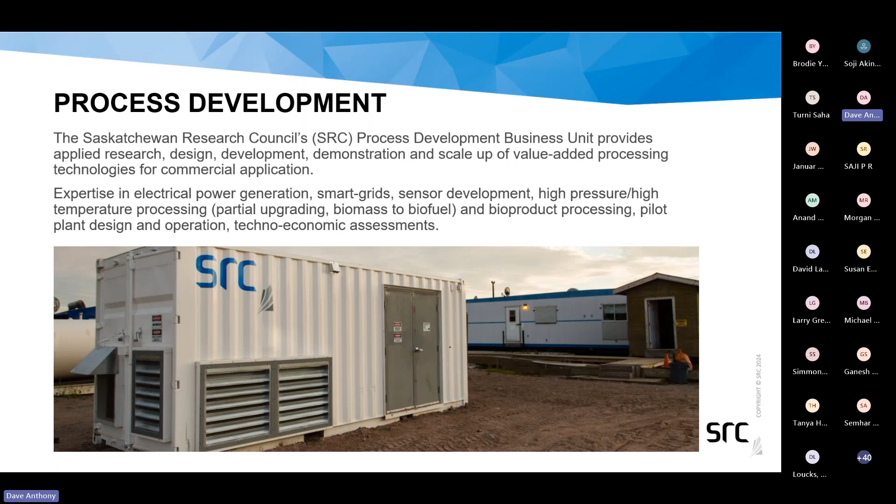So onward now to the RMJIC Hydrogen Hub study. I'm just going to take a sip of water here.

This report and study was a collaboration between the Transition Accelerator, ourselves, and the University of Regina. It was funded by the Saskatchewan Ministry of Energy and Resources, Federated Cooperatives Limited, and Whitecap Resources. They are the steering committee members, and of course involved also in discussions are the broader stakeholder group, including over 25 organizations like the cities of Regina and Moose Jaw, utilities, mining companies, agricultural companies, transportation, communities, etc. And of course, interest is open to all parties as we do these.

So the RMJIC, the Regina Moose Jaw Industrial Corridor area of interest for the project, is noted by the red polygon here, extending from the east of Regina to the west of Moose Jaw and including Belle Plaine. The extent of that area of interest was chosen based on the available data and locations of industry and potential opportunities that could be associated with hydrogen in the region. The treaty lands and First Nations areas within the RMJIC that we mentioned earlier are also shown.

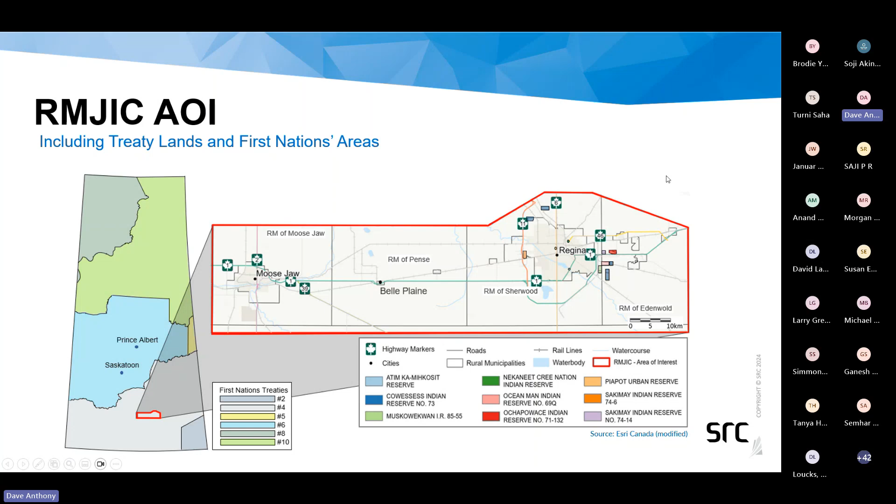And then first off, we'll get into infrastructure here. One of the ways of moving hydrogen would be the use of our highways and rail networks. Shown at the top of this slide are the major highways and rail networks running throughout the RMJIC. The main highways that connect the region to Western Canada, Eastern Canada, and the US are shown.

The same is also shown here for the CPKC, or the Canadian Pacific Kansas City Railway, which runs through the Global Transportation Hub here in Regina, and the Canadian National Railway as well. Shown below, zoomed out from each of those, are the main highway routes on the left, the main railway routes on the right between CPKC and CN, en route to the coast of BC and to the US.

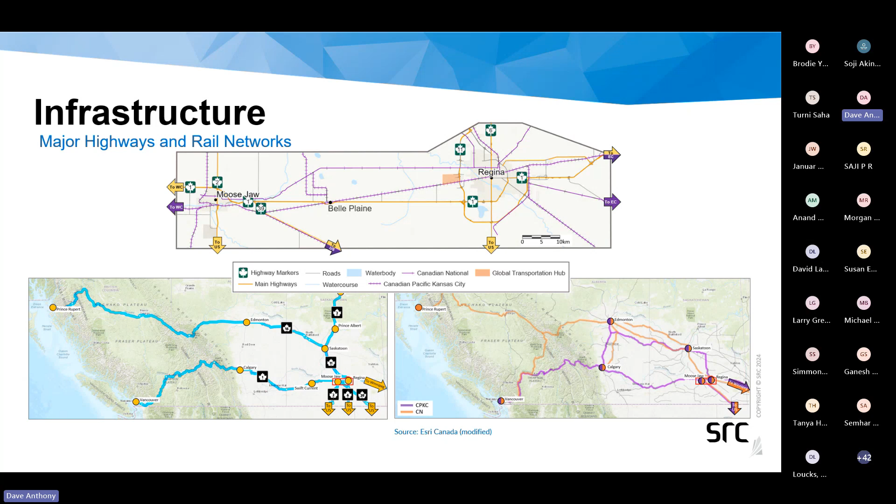Of course, opportunities could be there. We don't produce as much natural gas as Alberta does, in terms of opportunities there for hydrogen production for export. And as well, the US appears to be moving much faster when it comes to the development of hydrogen hubs. So it's really tough to say what that export potential might look like for Saskatchewan across the board.

As well, infrastructure - just looking at the liquid and gas pipeline network from the RMJIC through to the coast of BC. Of course, hydrogen blending pilots are ongoing in Alberta, as many of us know, at 5% blending rates. Research has shown that we may get up to 15 to 20% blending, but that's really somewhat site and area specific. There are more things to look at in terms of using those pipelines for hydrogen blending, but with interest, Saskatchewan could look at similar pilots, hydrogen blending with natural gas over the early to midterm. Ultimately, if we're looking at large scale adoption of hydrogen for building and process heat, there would certainly have to be significant upgrades, including dedicated pipelines for hydrogen. But these pipelines would also serve other hydrogen markets, including transportation.

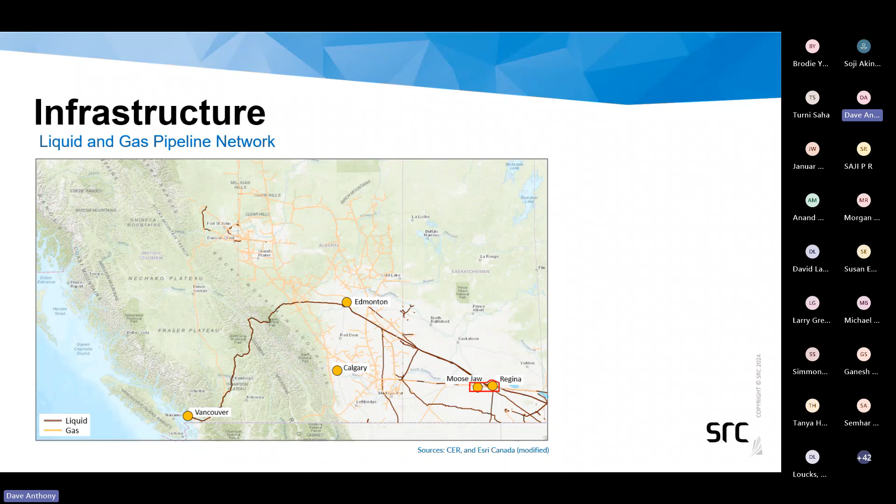There could also be potential for the agricultural industry here, with a third of transportation energy use in the province tied to farm machinery. It's hard to believe, with over 1,000 medium and heavy duty trucks rolling through the southern half of the province every day, that a third of that energy use is through agriculture. But we'll be showing a bit of that later on in the presentation.

So yes, infrastructure again - this slide shows the 9 or 10 major industries throughout the RMJIC that could possibly use, or in a couple of cases produce, hydrogen to support a hydrogen hub. It also shows the location of approved CO2 storage and approved lease of space for future CO2 storage in the RMJIC. It also points to the Weyburn-Estevan CCUS hub south of the region, where CO2 is used to support enhanced oil recovery and reduce emissions in the process. Now, if the RMJIC is to produce blue hydrogen from natural gas, that captured CO2 would also require a solution for its storage and use. So it would therefore be ideal to have a CCUS hub to support a future hydrogen hub.

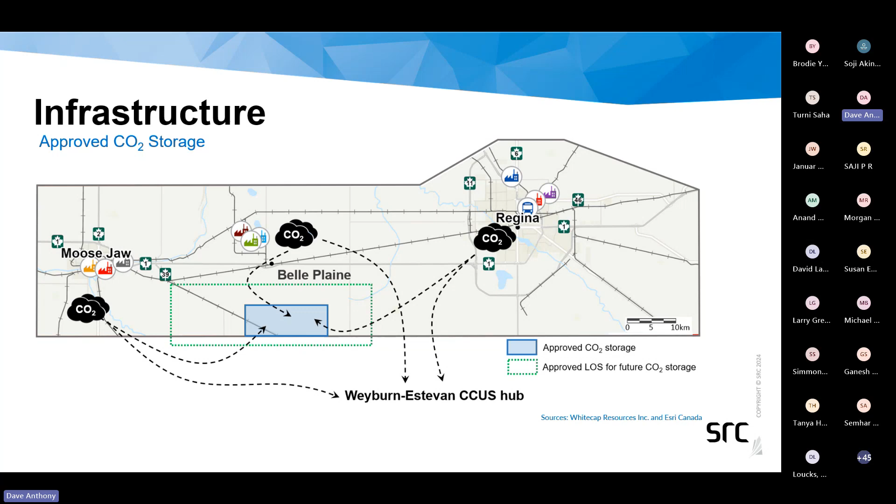So, early estimates - early on in the project, we wanted to help sort of set the focus for the project, and so we produced some early estimates based on current energy use to help us with that. So when we break down...

Just going to grab another sip of water here, folks.

As for the transportation sector, we see opportunities for medium and heavy-duty trucking, which Alberta and other provinces are currently moving forward on in terms of hydrogen, diesel, dual fuel trucks, and so on. Our greatest opportunity in transportation could stem from one of our greater challenges, and that's agriculture, with that third of total transportation energy use throughout the province. But it's too big of an opportunity, or certainly too big of a challenge, to ignore.

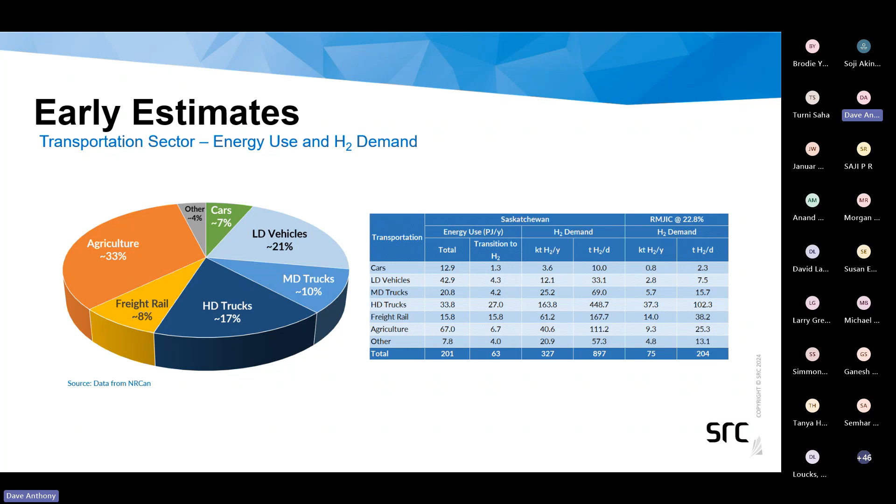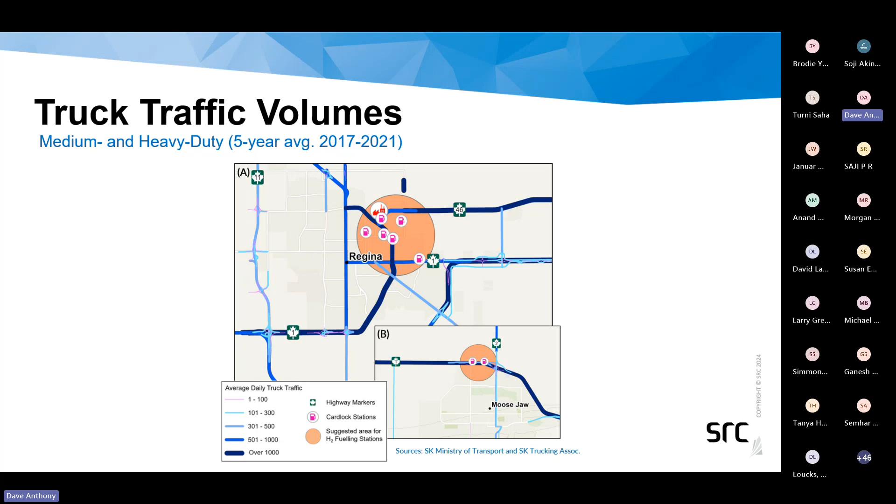Looking at hydrogen production costs, this slide comes from the Transition Accelerator. They use it in some of their other materials. We've just slightly modified it. It shows that the early adoption of hydrogen fuel would also be targeting a transition from diesel in the transportation sector, at least in the early stages.

Consumers pay much more for diesel per unit of energy than for natural gas or for electricity. A retail price of $2 per liter of diesel would correspond to an equivalent hydrogen retail price of about $8 to $10 per kilogram, based on an energy efficiency of 0.86 gigajoules of hydrogen per gigajoule of diesel. So if you had a hydrogen production cost of around $2 a kilogram, this would leave you a margin of about $6 to $8 per kilogram to cover the costs of transport and infrastructure.

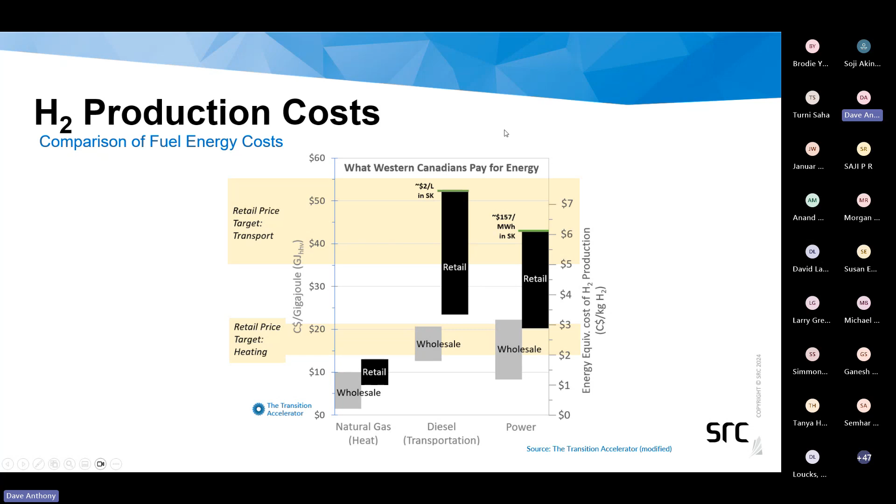So that $2 I'm showing here in terms of dollars per kilogram of hydrogen, shown on this chart, is the cost of hydrogen production as of 2022 and projections to 2030 and 2040, considering our current rate of federal carbon taxes. Most of the more common methods you'll see here for hydrogen production are shown. As discussed on the previous slide, that $2 per kilogram would be competitive with diesel, as shown on the right side of this graph.

We are practically there now when it comes to blue hydrogen production from natural gas. But of course, there are other costs in terms of moving hydrogen and so on, and storage. This graph also shows the production costs of natural gas and diesel. Since this is not an appropriate comparison in terms of comparing it with natural gas and diesel, I will show you the next slide, which shows that comparison in terms of energy units.

So when we look at this across the board, we can see that hydrogen is approaching the cost of natural gas production and is certainly competitive against the cost of diesel production, with the exception of hydrogen produced through electrolysis. However, this will certainly improve over time as those costs of electrolyzers improve.

While options for electrolytic hydrogen include production from nuclear, the production of hydrogen via nuclear thermolysis also could be very competitive in the years to come, which would certainly bode very well for the province of Saskatchewan, as nuclear is certainly moving forward here in the province and will be more of a thing come the mid-2030s.

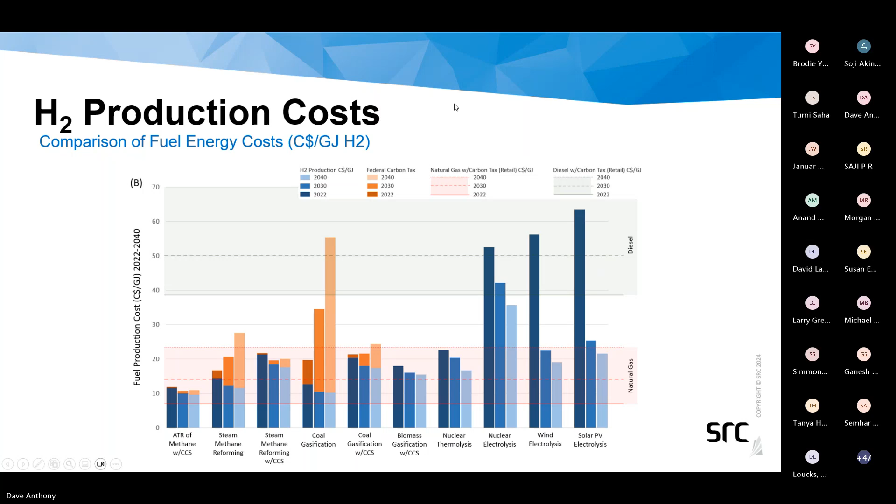And then again, from the Transition Accelerator, showing the cost of processing, transport, and fueling stations. This shows the economics of hydrogen production, transport, and fueling stations. Between the current cost of blue hydrogen production, the processing and transport of hydrogen at upwards of 8 tons per day, and the fueling of hydrogen transport at a minimum threshold of 2 tons per day, the retail cost of around $7 to $8 a kilo is then doable for transport, as shown by the retail price target for transport, that upper yellow horizontal band on this chart.

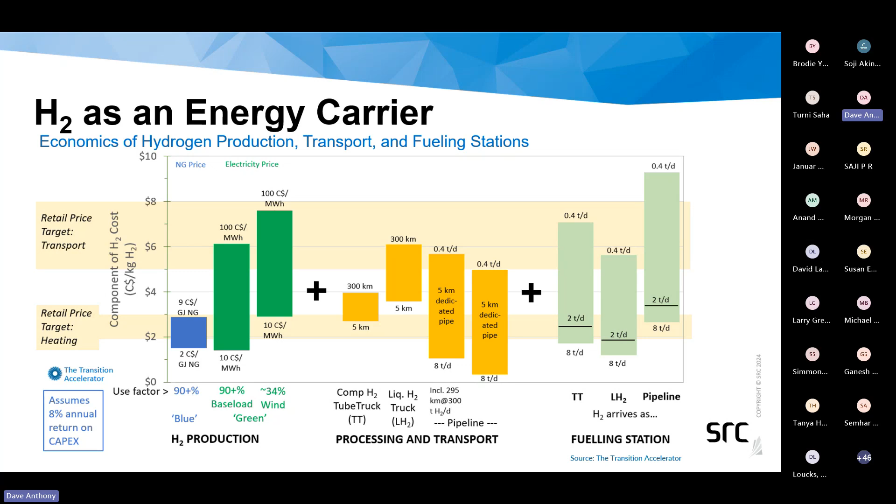As for the target retail price for heating, we certainly will need more time in order to get to something that works for hydrogen there.

I did mention underground hydrogen storage in salt caverns. This map shows the thickness of the prairie evaporite throughout Saskatchewan, from which our potash is mined. It's also a zone of potential hydrogen storage, having been used for natural gas storage over the years. However, this opportunity deserves more in-depth study, and it's something we can work on here at SRC.

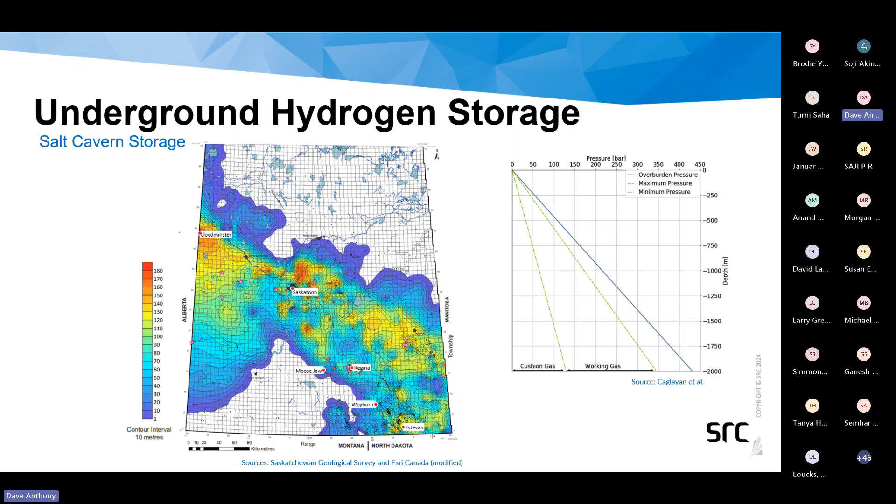To evaluate the ultimate opportunity and potential to support a hydrogen economy, as I noted previously, storage will be critical to large-scale hydrogen production, especially when supporting the intermittency of renewable energy. The chart on the right shows the depths and associated working gas pressures ideal for salt cavern storage of hydrogen, and our salt caverns here in Saskatchewan typically check both of those boxes, at least as a starting point. So then a deeper dive in these next couple of slides in terms of hydrogen demand.

When we did this for the report, this factored in the area activity in the RMJIC, as opposed to solely a percentage of the population of Saskatchewan.

Shown here, by 2028, 98% of that demand will be attributed to industrial feedstock, as it is now, for oil refining and fertilizer production in the region. Of the 2% attributed to fuel, nearly half is estimated for the transportation sector, as they are among the earliest hydrogen fuel adopters. Considering that demand for hydrogen fuel, the total is estimated at around 16 tons per day by 2028 between industry, transportation, and commercial and residential applications.

Now we look at estimates for hydrogen demand by 2035 based on area activity. That demand jumps to roughly 146 tons per day, with a greater share attributed to fuel at 16%, and demand increasing in the industrial, commercial, and residential sectors.

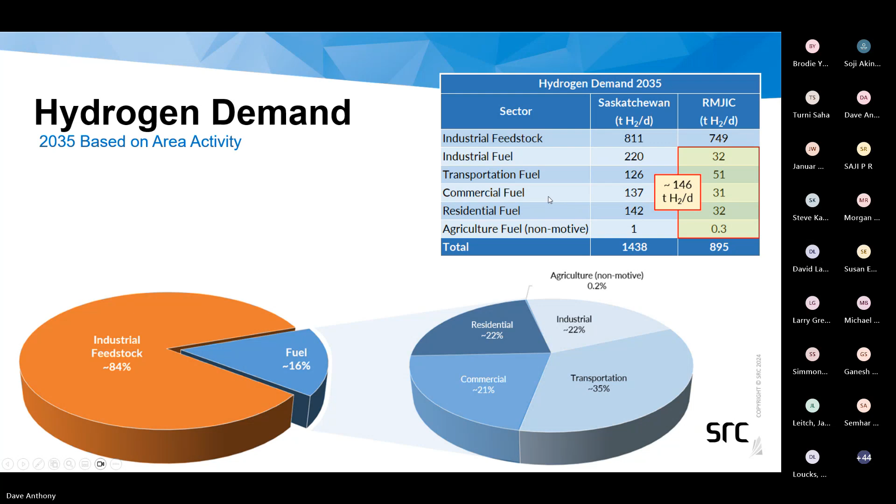In the transportation sector by 2035, through the estimates of the 51 tons of hydrogen per day estimated for transportation, most of that falls under long-haul transport, medium or heavy-duty trucks, and freight rail.

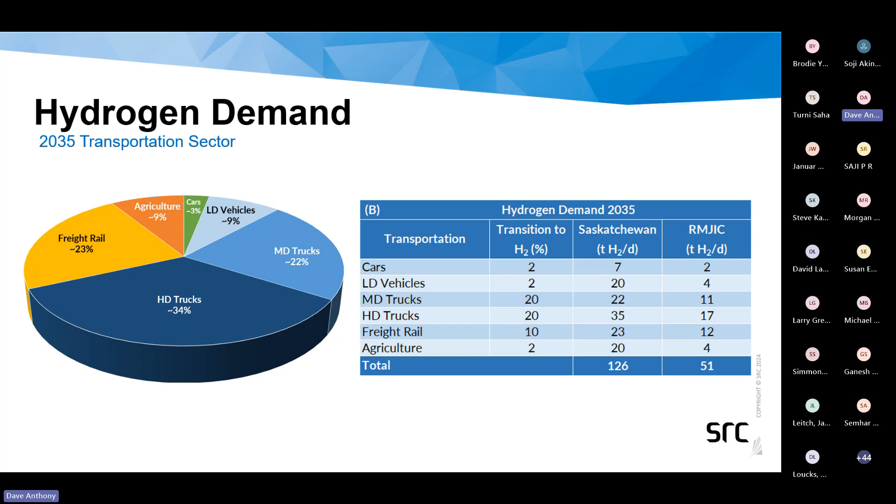As mentioned, hydrogen diesel dual-fuel truck development and pilot demonstrations are well underway, certainly in Alberta, and a transition to 100% hydrogen fuel cell trucks will likely follow as we have the infrastructure in place. CPKC, Canadian Pacific Kansas City, already has 3 hydrogen fuel cell trains in Western Canada, with plans to bring on more.

As I mentioned, yes, we need to be looking at CCUS opportunities here, because where there is potential to produce blue hydrogen from natural gas, there is a need for a regional CCUS hub to support a regional hydrogen hub. In the case of the RMJIC, this could tie into the Weyburn-Estevan CCUS hub in southern Saskatchewan, the area of Boundary Dam and EOR with Whitecap, CO2 EOR. With a connection via pipeline, potential producers of hydrogen in the RMJIC could send their CO2 to support emissions-reduced oil production in the province.

So then we look at potential demand in a low emissions future, taking 2050 roughly as the time frame for that. Total demand of 776 tons of hydrogen per day could represent a market potential of over $700 million per year for the region, at a wholesale price of $2.50 per kilogram for hydrogen. Expanded to the entire province of Saskatchewan, that total market potential in a low emissions future would be about $2.7 billion per year, again based on that $2.50 per kilogram.

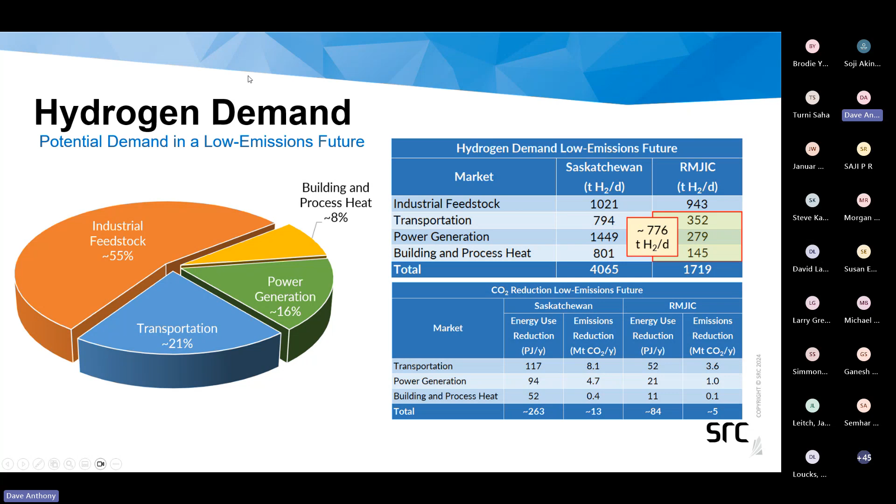As the transportation, power generation, and building and process heat markets reach 45% of hydrogen demand by 2050, the subsequent emissions reduction would total roughly 5 megatons, 5 million tons of CO2 annually. As I mentioned previously, we are currently at about 3.5 megatons between the top 9 industrial emitters in the RMJIC.

So here's a bit of a recap of some of the challenges and opportunities, because as we know, with everything we do going forward for the energy of the future, which would include oil and gas and everything we are working on now, there are certainly a number of challenges and opportunities there. So to go through the left-hand side, the challenges: we're looking at the current retail cost of blue hydrogen.

The retail cost today of blue hydrogen in the RMJIC, somewhere $5 to $7 per kilogram, would only be competitive in a transportation market. This assumes about 5 kilometers of dedicated pipeline from a natural gas production source, so again being close to the production of hydrogen.

As could be the case in the east end of our province here, near the RMJIC of operations. Power generation and building and process heat markets would require a total retail cost of $2 to $3 per kilogram to be competitive, as we know. Adding salt cavern storage for increased scalability would also require additional cost, so the economics certainly are a challenge going forward.

Hydrogen properties and energy efficiency: efficiency losses from the multiple transfer of energy are certainly challenging when using electrolytic hydrogen for grid storage. Losses from production from electrolytic hydrogen and conversion from hydrogen can range anywhere from 30 to 80%, and some of those sources are noted in our report.